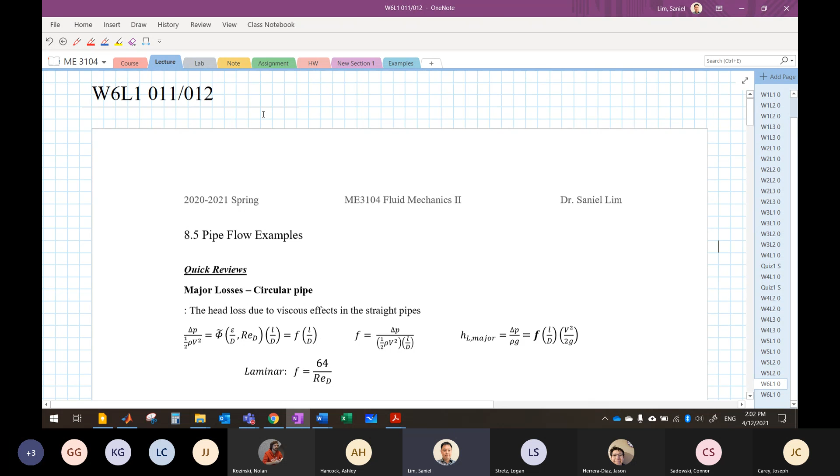Okay, let's go to lecture. Now we're going to cover some example problems of pipe systems—single pipe, multiple pipes, and multiple sub-components within turbine, pump, and so on. It's better to work on the lab rather than just solving problems in the textbook, but you're going to do both, so you can understand how to look up the Moody chart and how to apply it to the actual system.

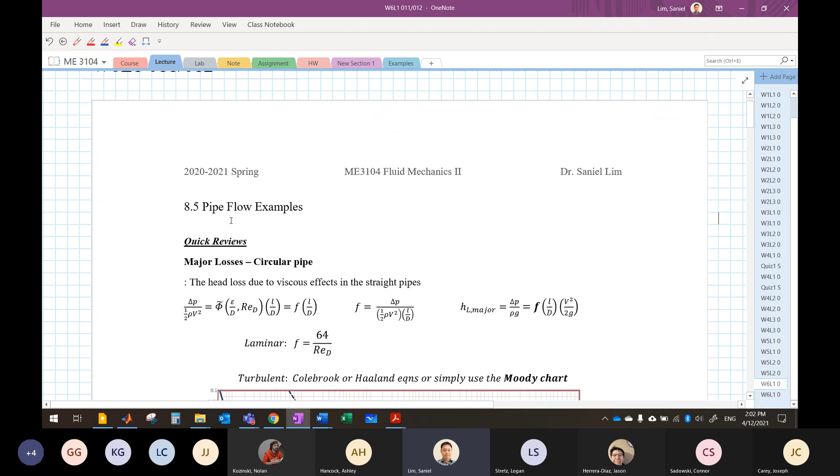Let's revisit the lab lecture materials from last week. We have two losses: major losses and minor losses. Major losses are because of viscosity effects as flow moves down the pipe. We ran the dimensional analysis and found the pi terms—one here, another one here. This one gives the pressure drop within the pipe in dimensionless form, and this one gives the properties of the surface roughness.

If it's laminar flow, we can just ignore the roughness term. There's a Reynolds number, which gives the dimensionless group relating to velocity in the pipe, and L over D, which is the geometry of the pipe, characterized simply by the length and diameter. In order to characterize the viscous effects in the pipe, we introduced the friction factor, F—simply taking the whole part in front of the geometric property, since we know there's a linear relationship between pipe length and pressure drop.

So we can treat this whole middle part as the friction factor. In head form, the head loss equals the friction factor multiplied by L over D, the geometry of the pipe, times the dynamic pressure, which came from the dimensionless group of the pressure drop. If it's laminar flow, we can apply the exact solution found from the Navier-Stokes equation or the Bernoulli equation.

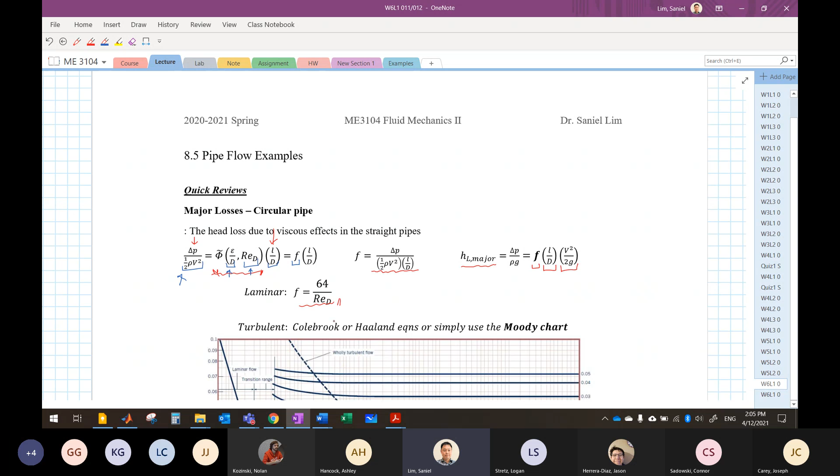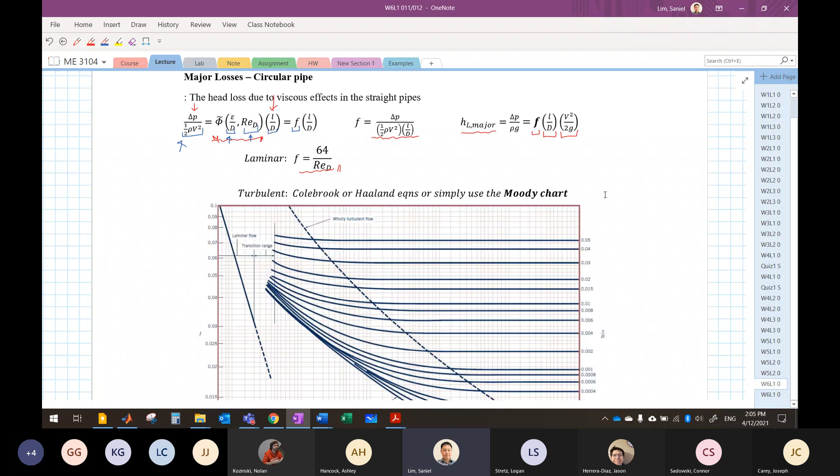Then for turbulent flow, there's two equations. We have Colebrook, and another one's a modified Colebrook or Haaland equation, or you can just use a Moody chart. If you just finish this course, I hope you at least know this Moody chart was part of the lecture. You're gonna look up this Moody chart if you deal with any pipe system from now.

This single graph gives you a whole bunch of information relating to the viscous effects in the pipe, and how to calculate the pressure drop based on the length of the pipe, diameter of the pipe, material of the flow media, and whether it's laminar or turbulent. All the information we learn in the chapter, partially in chapters 6, 7, and more than half of chapter 8, is actually described in this Moody chart.

What's that? Moody chart? Oh, which one? Oh, no, from this course. Yeah, probably you've heard about this chart, but we introduced this one especially from the lab lecture. I talked about it, and you know how to use it from the example problem from now. So I'm gonna just use it for the example problem.

There's another table we can find in the textbook, the surface roughness table. Of course, if it's given in the problem, you can just use it. But if it's not, you can look up this table based on the material, manufacturing method, and fabrication. So there are different types of roughness characterized within some range.

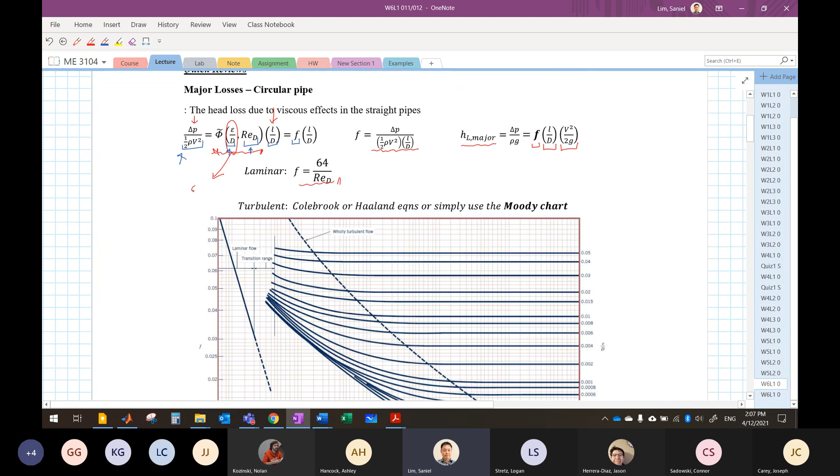To find this dimensionless surface roughness divided by the diameter, you can just look up the number here, then find your curve. If you know the Reynolds number, you can find the location within the graph. If you know the friction factor, you can locate the position there. Or, in the opposite way, if you know the friction factor and the Reynolds number, you can characterize the flow based on the surface roughness.

So these equations are the ones listed above. The first one is the Colebrook equation. In this equation, you have the friction factor on both the right side and the left side. It's really hard to solve. So you need to either iterate the calculation based on your assumed friction factor, put that into the right side, and find the left side. If it's not matched, you can just assume another one and keep going. So probably 3 or 4 iterations will give you the right answer.

It's a rough approximate solution. For the modified one, the Haaland equation gives you a single equation, so the friction factor can be found explicitly. When you plug in the surface roughness and velocity in the Reynolds number, and you know the fluid in the pipe, you can find the friction factor from this equation. Of course, you can also just draw this graph to find the Moody chart. Okay, so it's fine.

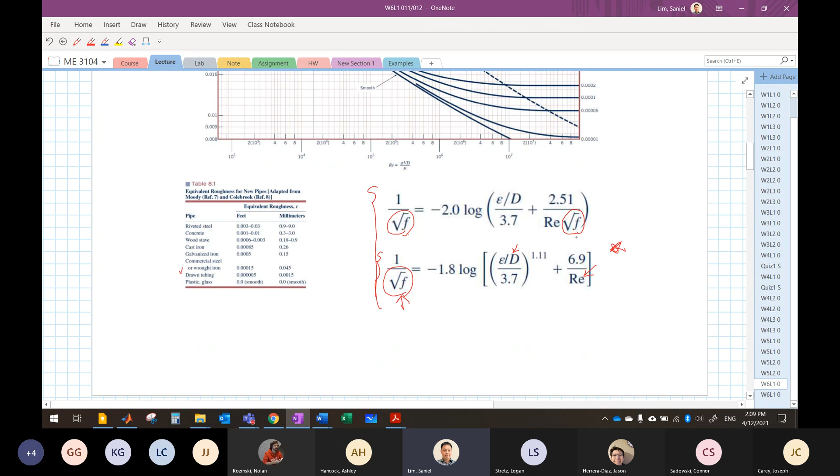You can use either equation, but usually you'd prefer to use the second one. The error between these two equations is going to be less than like 0.5%. But of course, this is pure empirical data, the Moody chart. So even if you find the right number here, it's going to give you at least... I don't know what the rule of thumb is in the textbook, but I bet it's going to give you at least like 10% error from the Moody chart.

But you can roughly know what the flow within the pipe is using this chart. So just do not obsess with finding the accurate value in the Moody chart. No, that's not the case.

For example, if I got the relative surface roughness as 0.002 here, and I want to find the Reynolds number like 10,000, then you can just follow this graph. 10,000 is here. Then I want to find the friction factor, so you can locate the point here. It's going to be roughly here, that's 0.03... no, it's going to be 32, 34, 36, so it's going to be 0.035. So you can find a number like that.

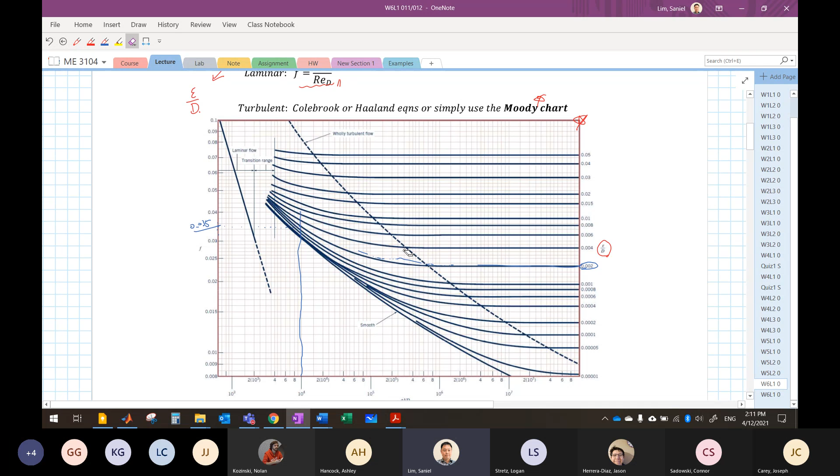All right, these are rough numbers. So just don't try to find a really exact number out of this. It's going to give you 10% error anyway. Okay.

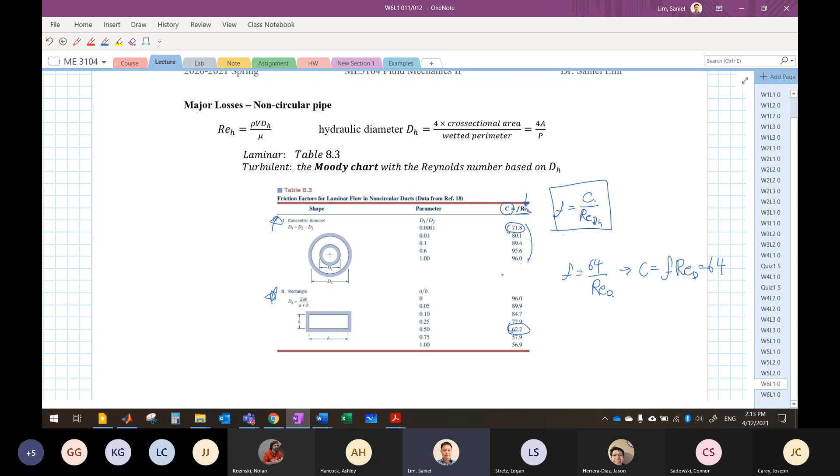What was the friction factor for laminar flow? It was 64 divided by the Reynolds number based on the diameter. So if you look at the values here, the C value is pretty close to 64 at some point, with some range close to 64. It's just a little bit lower or higher than 64 depending on the different shapes of the pipe. So you can have some sense that 64 is a reference value for the circular pipe.

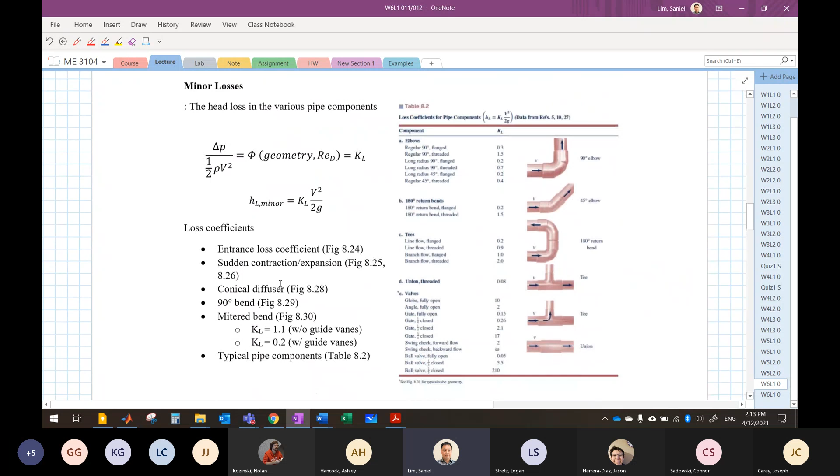And the minor losses - what do you calculate in the lab? It's going to be minor losses, the loss coefficient for each part. Especially you're going to calculate the friction factor and the surface roughness in the steel pipe and the copper pipe. Then the rest is going to be a venturi system. The venturi system is also a device measuring velocity, but it's also a single component within the pipe system, so it has some losses.

So this is head loss in the various pipe components. Regardless of the type or shape of the components, if it's not the viscous effect, it's all minor losses, and these can be more significant than the major losses in some cases. So pressure drop divided by dynamic pressure is a function of geometry and the Reynolds number instead of surface roughness and the length of the pipe. So we take this whole function as a loss coefficient KL, which we can convert into head loss form.

Then head loss by the minor losses is KL multiplied by V squared divided by 2G. It's relatively easier than the major losses because it's basically based on empirical data. So if you know the KL, you can just plug that into the equation to find the head loss or pressure drop by the minor losses.

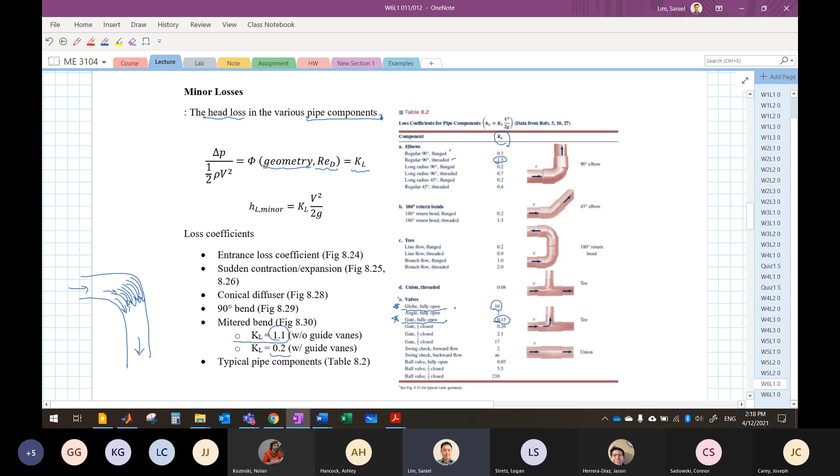So of course, I didn't ask you to find the loss coefficient of the globe valve and the gate valve. It's not a part of the lab, but you can see the globe valve, if it's fully open, we still have a 10 loss coefficient. And the gate valve gives you only like 0.15, fully opened of course. The flow is pretty much at the same flow rate we designed in the system, but just existence of the globe valve itself gives you the 10 loss coefficient. Pretty much a lot of losses, right?

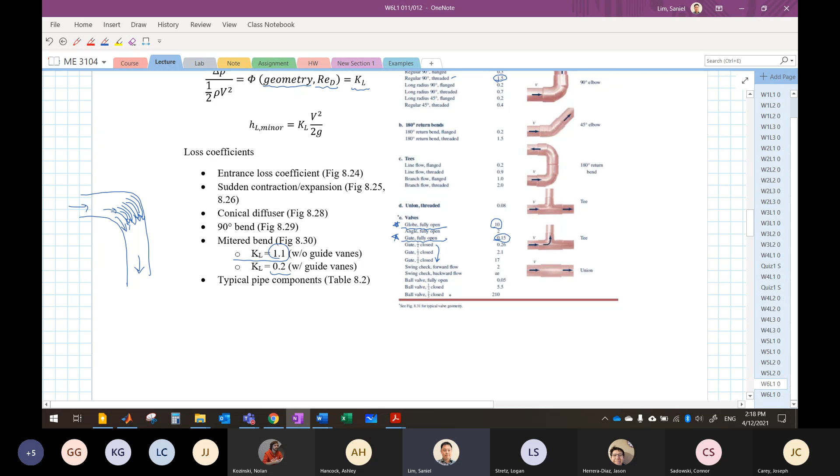Then of course you can find all the different loss coefficients when it opens halfway or a quarter, and so on.

Now we have a little bit of examples here. I'm not gonna solve all the example problems here. We have a lot of them, and it's going to be very useful when you take the next exam and quizzes. But I'm gonna just post the solutions of these examples. Of course, you have all the numbers and solutions in the textbook, but I'm gonna just solve it again with my words. Then you can just take a look at the steps of the problem solving one by one, line by line, to apply those loss coefficients and find the friction factor for each component.

So we can simply use the energy equation. You saw this a lot, right? From chapter 5. I just modified it a little bit, putting the pump head and turbine head. This is pump, this is turbine. So basically, you can apply work into the flow itself, or you can extract energy out of the flow. That's why we place this head on the left side for the pump, and on the right side for the turbine. Then we have a loss head.

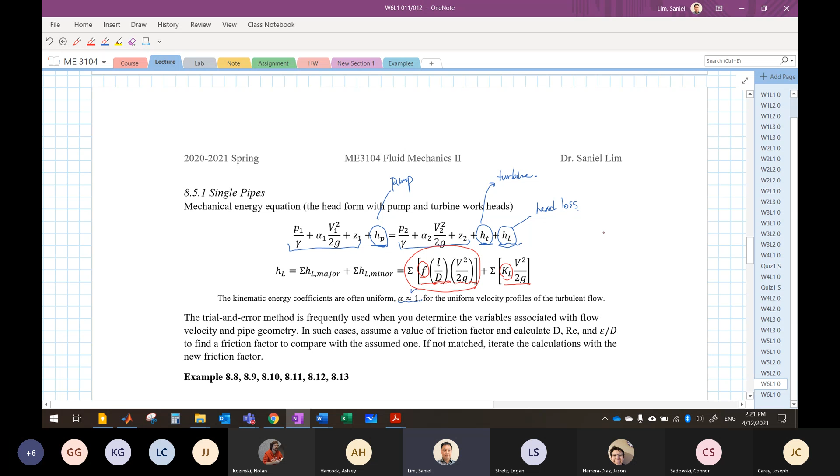Then, for example, if you look at the pipe system under a sink, you might see a lot of 90-degree bends, like more than 5 or 6, then this part is going to be dominant in the loss.

So if you apply this method, you can just solve it, but there's a lot of variables going on. So please just make sure you write down all the variables, especially density and viscosity, which are all going to be shown in the table B1, B2 I guess. But also, you can write down all the pressures or velocities or flow rates or heights given in the problem. It's better to just write them down on the sides of the paper, then you can work on the equations.

But the thing is, if the pressure drop is given, then what if the problem asks you to solve for the diameter or the velocity in the pipe? Then you have to solve it backward. But the thing is, you have a V squared inside, or the diameter is associated with it, especially in the friction factor, and you've got to put that into the Reynolds number again. So it's not going to be easy to solve explicitly. In that case, just remember one tip: assume the friction factor, right?

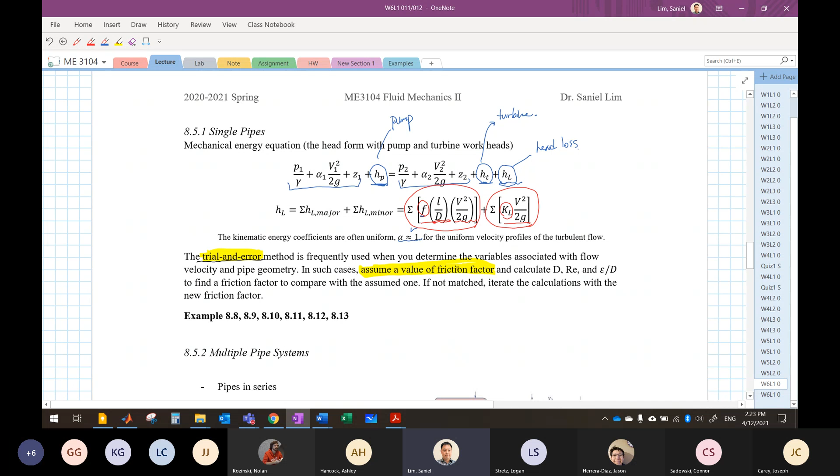You have a lot of variables, so you do it this way. Make the assumption that the friction factor is, let's say, 0.002. What you're going to do is go to the Moody chart.

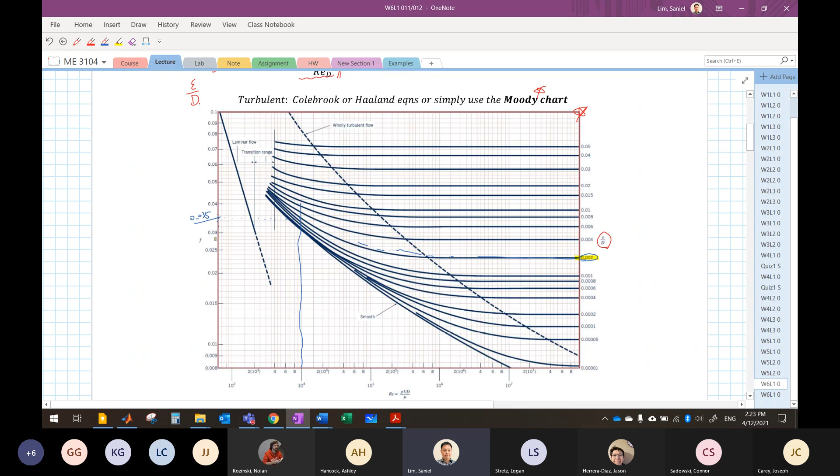Use this number. Then if you know the velocity, you can find where it corresponds. If not, you can make the assumption with different variables to find the friction factor. Then you can find the Reynolds number corresponding to the points, then find the velocity.

Oh sorry, that's not the one. So here, like 0.02. That's here. Okay, this is 0.002, probably about that area, right?

So you can go this way, then find the surface roughness and the Reynolds number. Based on those variables, you can just find the location there. Then using these values, what you're going to do is find the friction factor again.

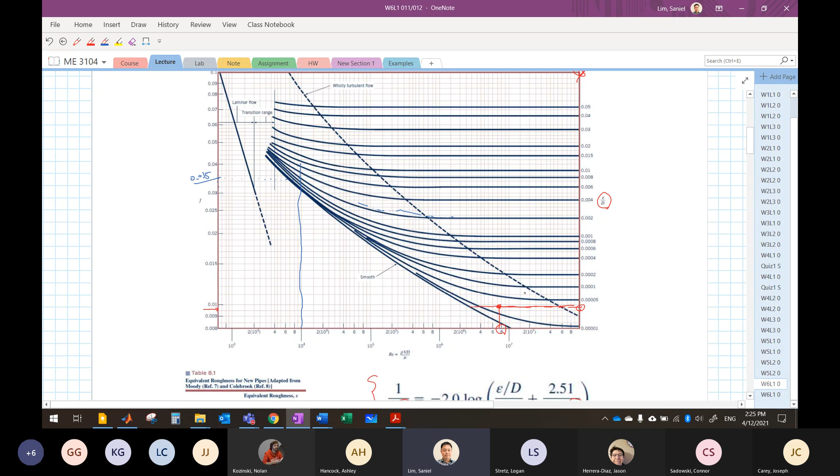Then if the friction factor you assumed doesn't correspond to the one you found in the Moody chart calculation, you can reapply the friction factor to the Moody chart and find another Reynolds number, and keep doing the iterations like that. So it's better to solve the problem using the trial and error method.

But just one thing: let's make the assumption of the value of the friction factor first. That's going to be the easiest way to solve the problem.

If that's the problem on the exam, I'm not going to ask you to do more than 2 or 3 iterations. You probably just need to shoot the variables within a certain range and repeat the calculation twice. That will be good enough to conclude that your answer for velocity is some number, or surface roughness is at a certain number, things like that.

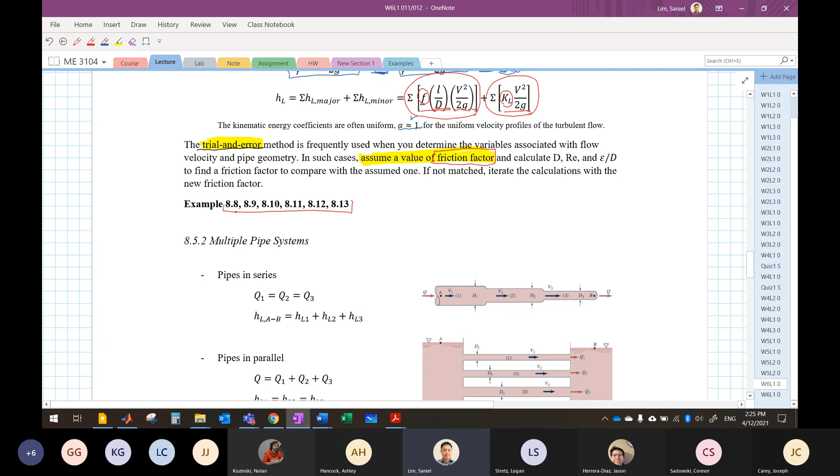All right, we have these sets of example problems. If I have more time, I'll probably cover some. I'm going to solve the first problem, then I'll post all the solutions to these examples, probably today.

All right, then what if we have multiple pipe components within the system? Of course, at some points we have a different diameter within the system. Yeah, that makes sense, that's the usual case. Then what if we have a different route of pipes connecting to two different tanks?

If the pipes are connected in series, then you can imagine the total flow rate at the inlet and outlet should be the same, right? So we can write the equation that Q1, Q2, Q3 are all the same value. You can think of this as analogous to Ohm's law.

We have a little bit different relationship, but it's similar to V = IR. In this case we have a little bit different, and I don't use that method because it doesn't correspond to our system. But usually, if it's laminar flow, it's linearly related to the velocity in the pipe, so we can use it.

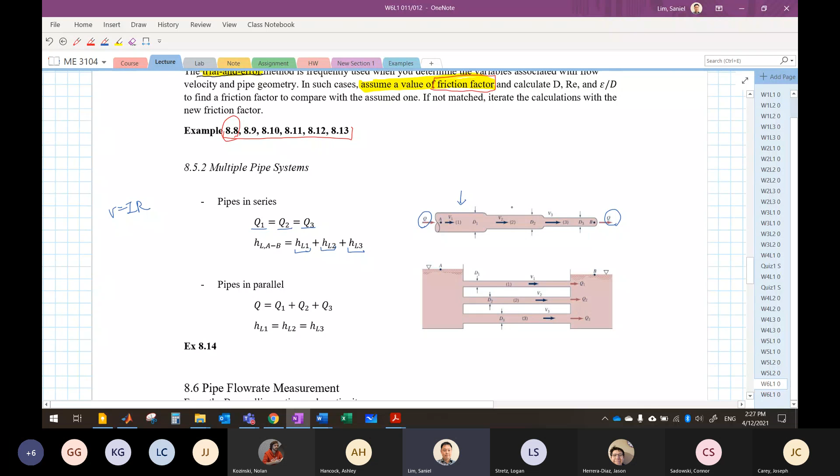But basically, the head loss is going to be just a summation of the head loss within each component. So if I have a head loss here, in other words pressure drop, for the first segment, second segment, and third segment, you can combine them all to find the total head loss.

What if the pipes are connected in parallel? Then the total flow rate should be Q1, Q2, Q3 added all together to find the total Q.

All right, and head losses are now a little bit different. The head loss should be the same value for each route. If we have a larger head loss in the first pipe, let's imagine that means we have more resistance in the first pipe.

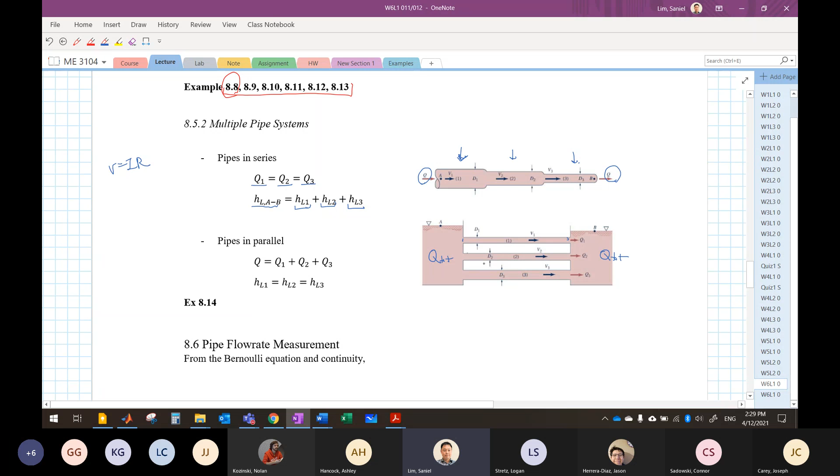Then flow is going to tend to flow down through the second and third pipes more, so you're going to have a change in the velocity and flow rates in the first pipe, right? So they're going to find the balance of this resistance, and the head loss should be the same between the 1, 2, 3 different pipes here. So regardless of the size of the pipe, regardless of how many components are within the pipes, the head loss should be the same between each pipe segment.

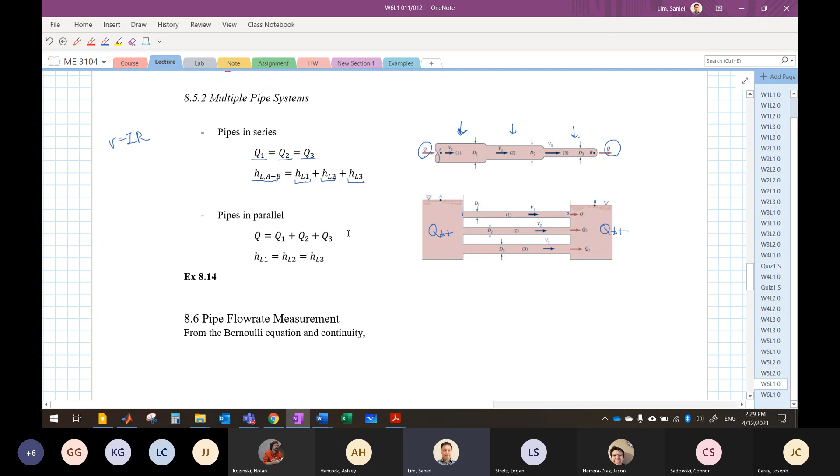So you're going to have one more example problem for this. I'm going to try to solve these examples with a lot of detail inside.

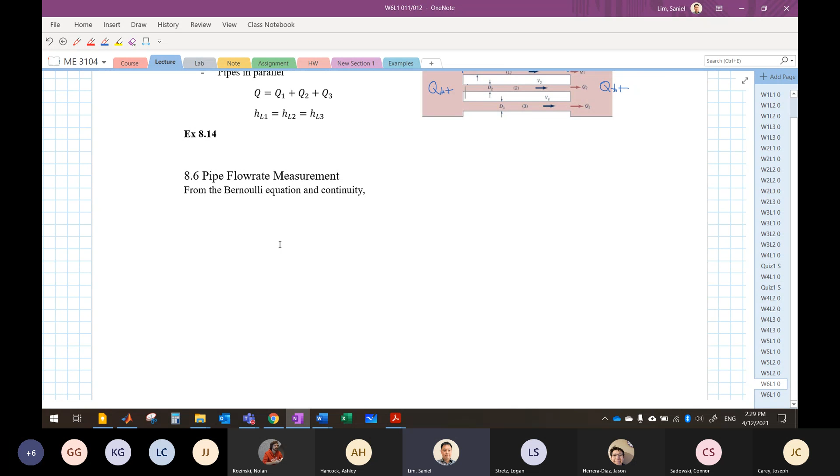Okay, so now pipe flow rate measurement. Let's derive the equation a little bit here. This is what you're going to do in the lab too. I introduced a little bit of it in the lab lecture. So from the Bernoulli equation and the continuity equation, what you have here is...

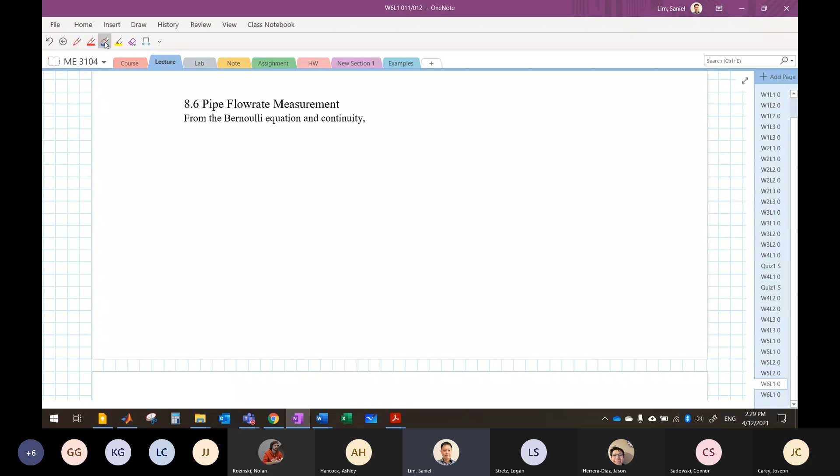Then of course you usually have a head loss, but let's say we don't have any losses here.

Just draw something here. Here's a pipe. We have some device here, whether it's a nozzle, orifice, or the venturi system, doesn't matter. Let's say we have a little bit of an obstacle within the system, then the flow is accelerated in the middle, then expanded again. This is the first location, this is the second location. Let's take a look at what's going to happen between this device. This is short enough, so we're going to ignore all the losses, which is the major losses and the minor losses. There's nothing here. That's my assumption.

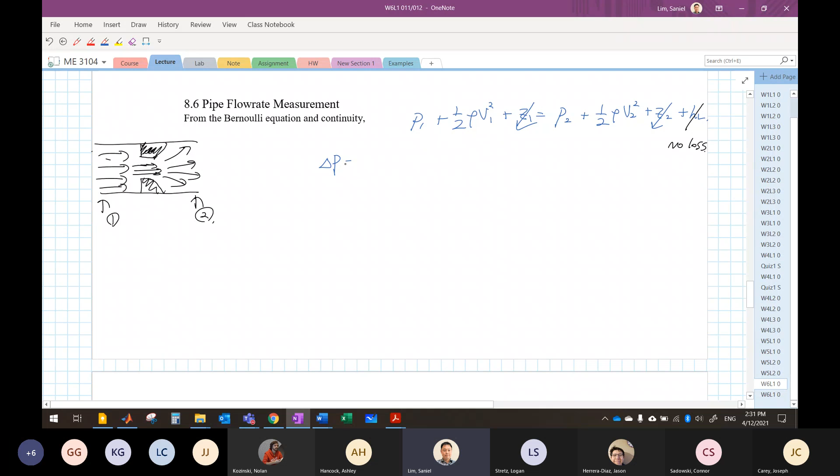What you're going to have here is, of course, we just set it in the horizontal position, so you can just ignore this again. Then the pressure drop, P1 minus P2, is simply one over two rho, V2 squared minus V1 squared.

Then what we're going to do is introduce the continuity here. According to the continuity, which is conservation of mass, the flow rate at the inlet should be the same at the outlet too. So Q1 should be the same as Q2. That means velocity at the inlet multiplied with the cross-sectional area has to be the same for the second location. We can simply rearrange it for V1: it's going to be A2 V2 over A1.

What if I just plug this into the Bernoulli equation here? Then it says P1 minus P2 is rho over 2 times V2 squared minus A2 over A1 squared, times V2 squared.

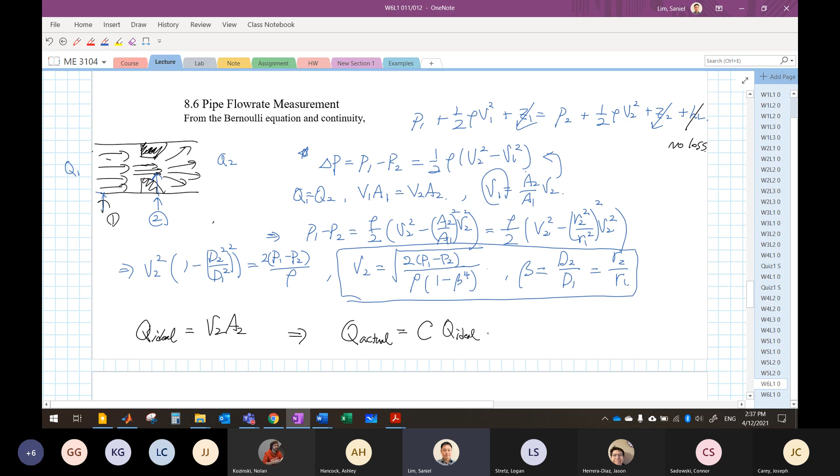No, there's going to be a little bit of resistance by this device, even if it's a meter. So it's not going to give you the ideal flow rate before and after the venturi system or orifice. Orifice is pretty much the obstacle, and the nozzle too. So what you have is the actual flow rate, which can be defined by one more coefficient here. I'm going to just put C here, and A2 V2 is the ideal flow rate, so the actual is C times A2 V2.

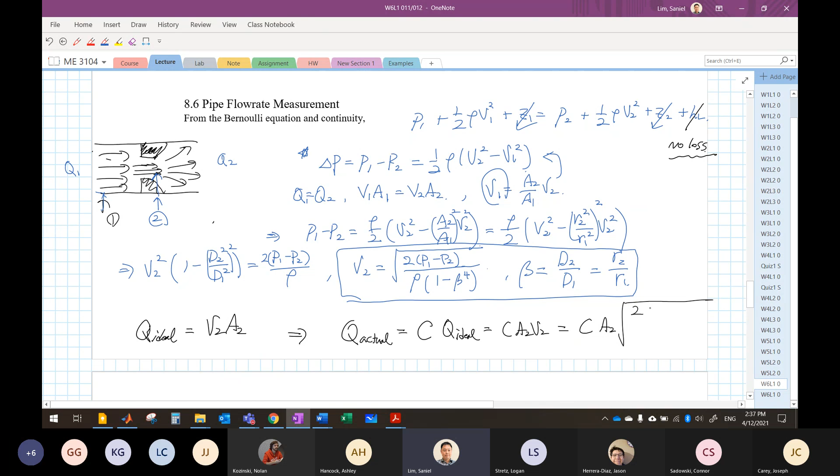Then you can just use this equation from the Bernoulli equation, because we made the assumption that there are no losses. It's going to be C A2, then square root of 2(P1 minus P2) over rho, times 1 minus beta to the 4th. So here, this C is what we call the discharge coefficient.

For the venturi system, you're going to find this discharge coefficient in the lab. This is for if it's an orifice, nozzle, or venturi system - the discharge coefficient uses subscripts O, N, and V respectively.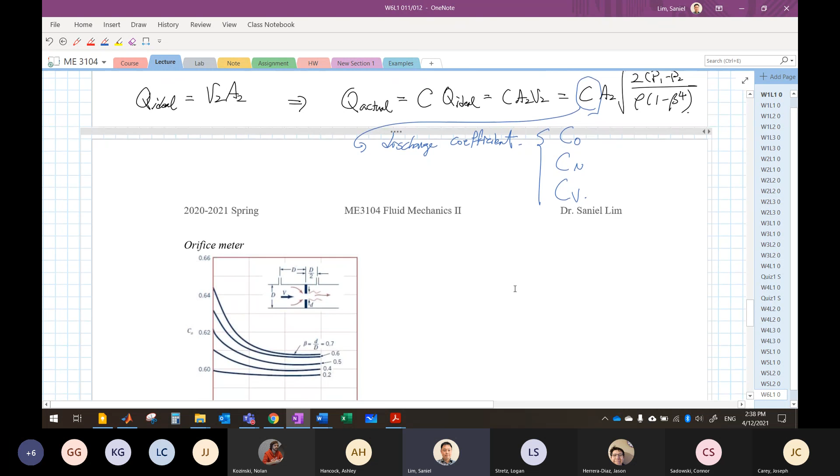If you go to the textbook, I've posted all the plots here. This is the empirical data set for the orifice meter. According to this plot, if you know the velocity at the throat - this is position 1, this is position 2 - and you have the Reynolds number based on the velocity of the flow, you can find the discharge coefficient of the orifice here.

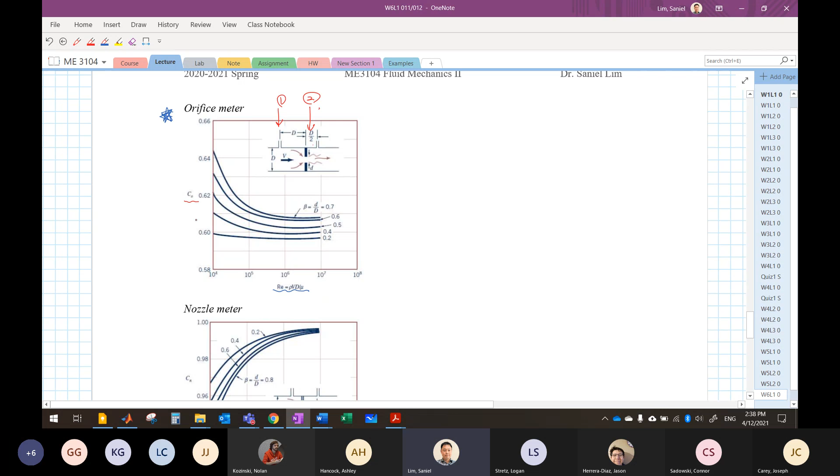If you know the discharge coefficient, let's go back - you can find the actual flow rate. Or if you know the actual flow rate, which is the lab case where we measure Q using the weight tank, then we know this value. Then you can calculate the value on the right side, which is the ideal flow rate, and from that calculate the discharge coefficient. That's what we're calibrating in the venturi system.

But usually these spec sheets or calibration table curves are given by the manufacturer, so we can just look up this graph to find the discharge coefficient for the orifice, nozzle, or venturi system. That's how you read this.

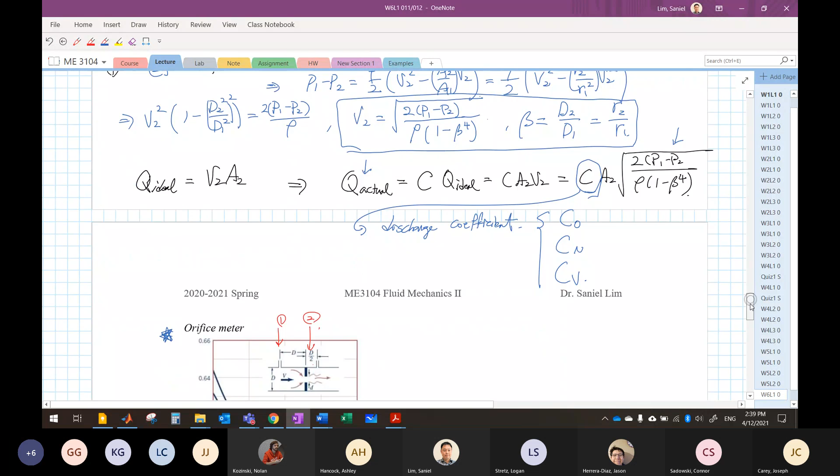For the nozzle system, you might get a sense of the level of the values here. We have 0.62, 0.64, 0.6 for the orifice - because we're essentially blocking it, literally plugging some type of iris within the pipe, so there's a lot of losses. But for nozzles, we have a smooth surface that increases the velocity without much loss before and after the nozzle system. That's why we have numbers more than 0.95 or so.

It's also basically based on the velocity of the flow and the geometry, which is defined by beta. Then you can look up the discharge coefficient values for the specific nozzle system.

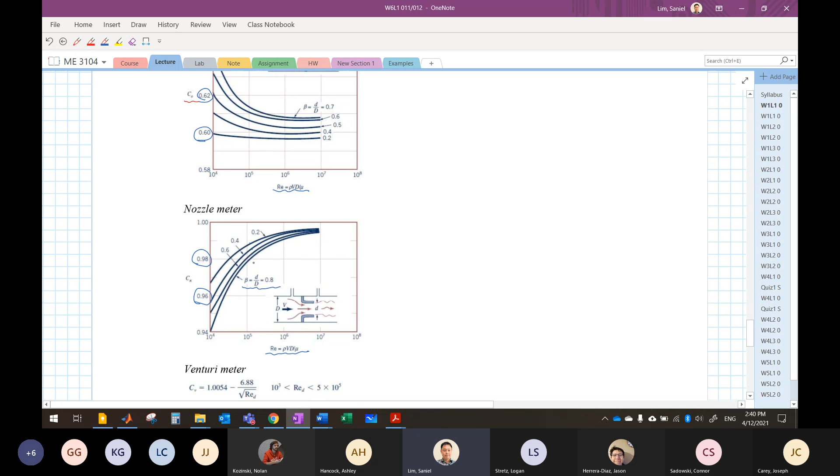The venturi system, we use a lot. You can go to ASME or many papers out there - probably from the 60s, 50s - they pretty much set up these equations. They developed more than 10 equations in the list out there, but usually they suggest using these equations to find the discharge coefficient of the venturi system.

So it's pretty much the curve of the venturi system. You draw this equation based on the Reynolds number, then compare your discharge coefficient from the lab to the one in the reference data. Of course, this is also from an empirical data set, so it's not the exact solution, but it's pretty accurate for anticipating the discharge coefficient in the system.

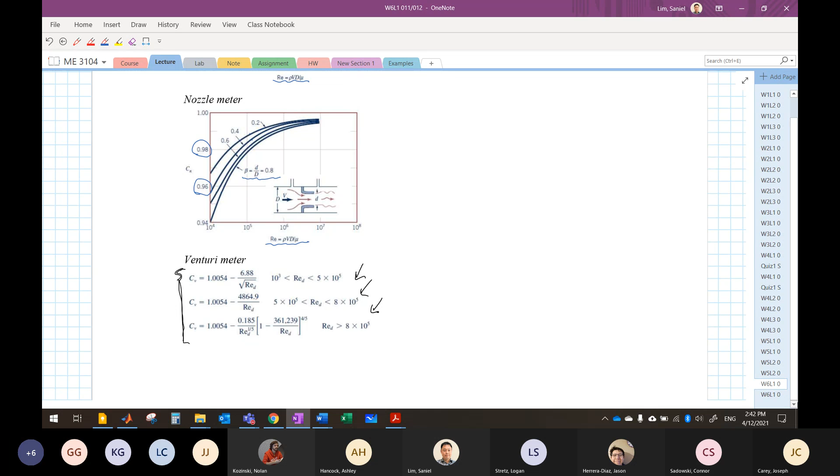All right, that's pretty much the part of the lab and chapter 8. What else? Then we can have a little bit of time - how much? Let's just copy it.

Let's go to this example - all right, let's take a look at one of the example problems here. So we have example problem 8.8, the first example problem in the example pipe flow. We're dealing with a water system.

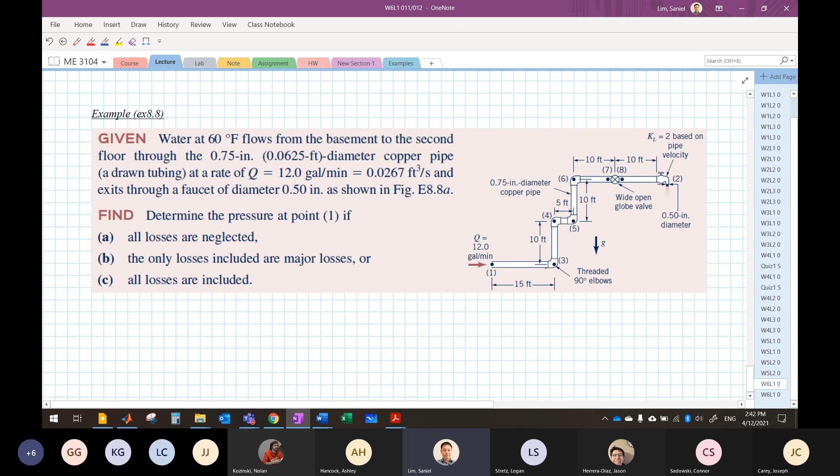You can see a somewhat complicated system with 90-degree bends here and there, and globe valves. We have taps here with a given diameter, some loss coefficients given, the geometry and diameter given, length given, and flow rate given. So it's going to ask you to find the pressure.

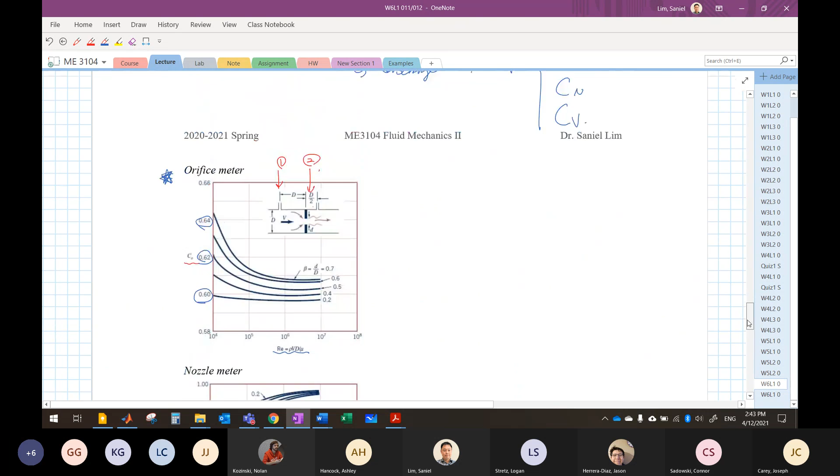Heights of the system are all given - we have 10 feet there, 10 feet there, that's going to be 20 feet between the first position and the second position. There's no pump. The pressures - yeah, you can find the pressure here.

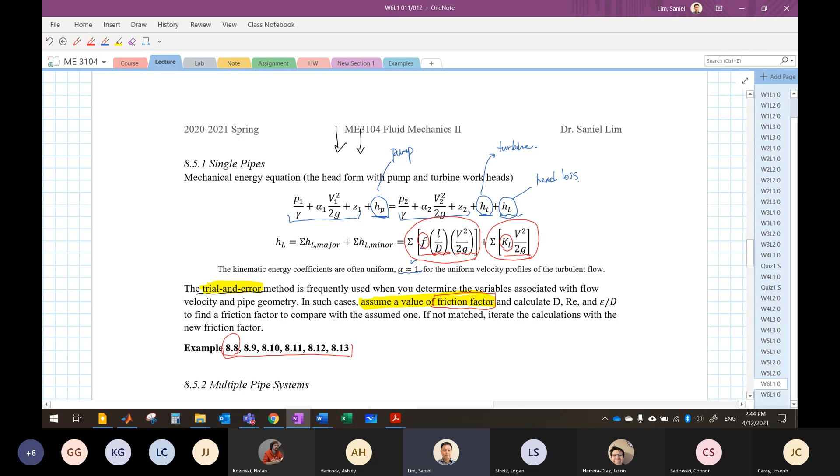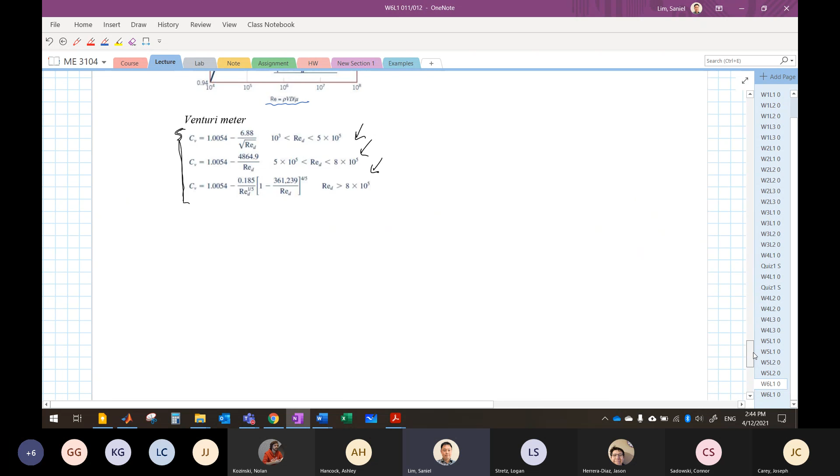Second position is what? The same surroundings, so it means the pressure should be atmospheric pressure, which is given. Then another velocity here - of course it's given, we know that. Height is given. There's no turbine, then there's a head loss, and we can find P. P1 is going to be the one single unknown in the equation.

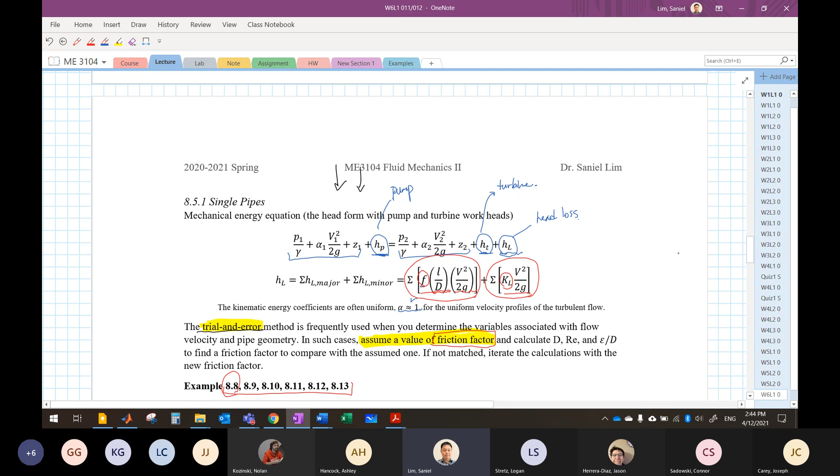There's no need to perform trial and error in this case. So we're going to find the pressure at point 1 if all losses are neglected, second only for the major losses, and if all losses are included.

Of course, I'm going to post a solution of these examples too. Let's just do as much as we can. If you go to table B.1, you can look up the properties of water - the density is given.

And viscosity, of course. That's why you have the temperature of the water here, just to look up the table. And simply you can just calculate the specific weight to make your life easier.

In the textbook, they use 62.4 instead of 62.47. So just stick to the textbook value, but accurately it's going to be 62.47.

What's given here is the diameter, 0.75 inches. Of course, you want to convert everything into the FPS system, or you can convert everything into the SI system. That's fine, I'll just divide by 12 to get the diameter. The flow rate is given as 12 GPM.

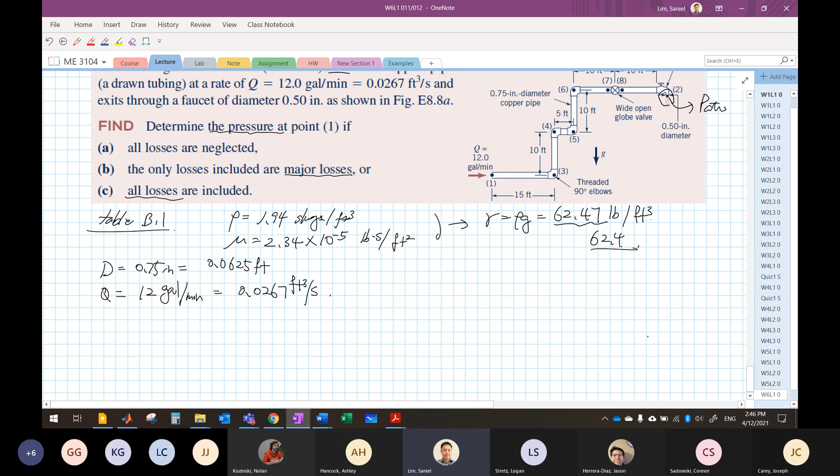Let's just apply the equation now. So simply we have P1 over rho g plus alpha 1 V1 squared over 2g plus z1 equals P2 over rho g plus alpha 2 V2 squared over 2g plus z2. Of course, we have a loss term there, but for the first case, we're going to ignore it, assuming there's no loss.

What's given here? Alpha can be assumed to be 1 if it's turbulent. You're going to check that later.

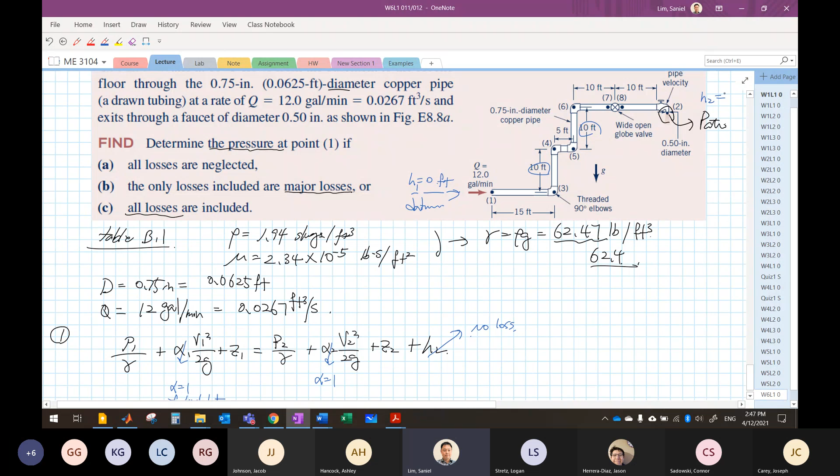If you go back to the problem, what's the height of the first location, the inlet? We can set it as a datum point. If it's the datum, height 1 is 0 feet. Then height 2 is 10 plus 10, which is 20. So this is 0, this is 20 feet.

What else? The pressure on the right side, the outlet, is released to the surroundings, meaning we have atmospheric pressure. So P2 is simply P atm. What else do we have?

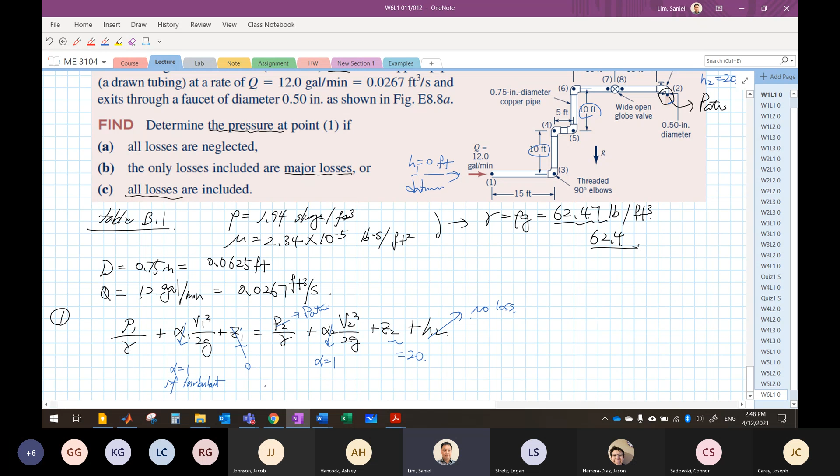I think that's good enough to go solve it. If we just rearrange it, we have P1 equals specific weight times z2... z1 is gone, plus one half rho times V2 squared minus V1 squared, plus specific weight times the head loss. Of course, we don't have any head loss.

And that's it. Then it's time for the velocity. We have the volume flow rate given, and it's simply velocity multiplied by the cross-sectional area.

So V1 is Q divided by A. That's 0.0267 feet cubed per second, divided by pi times the diameter, 0.0625 divided by 2, squared. Then you get approximately 8.7 feet per second.

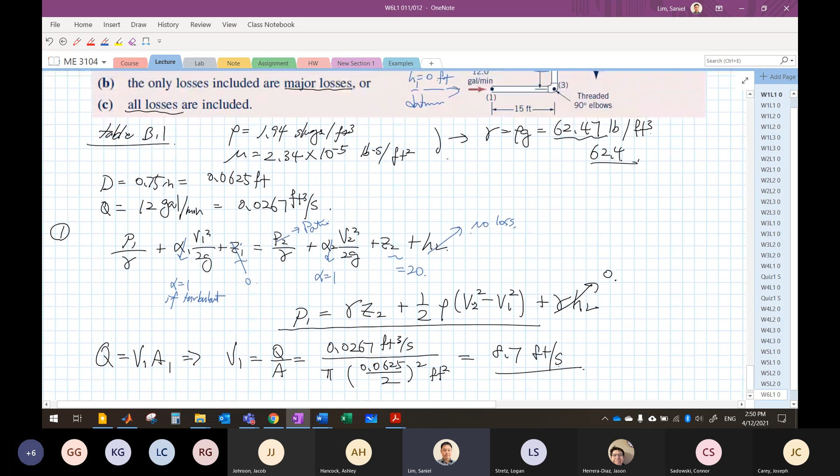So you have the velocity now. Then the next thing you're going to do is always find the Reynolds number. Whenever you have velocity, you want to check the Reynolds number to look up the Moody chart, or put it into the equation, but still you always want to check the Reynolds number. Why? Because you always make the assumption of turbulent flow to check if alpha equals 1.

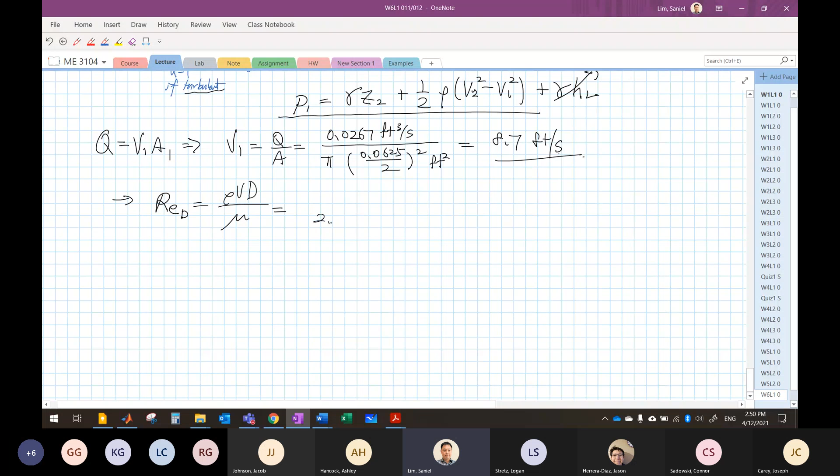So always do this step: Reynolds number equals rho V D over mu. When you plug in the numbers, what do you have? 2.34 times 10 to the minus 5... do we have this value here? Yeah. Density 1.94, velocity 8.7, just use at least 3 significant digits, diameter 0.0625. Then what you're going to have is 45,000.

So is this turbulent flow? Yes, larger than 4,000, so it's turbulent.

Then you can just plug all the numbers in to find the pressure value here. So P1 is going to be... squared, if there's no loss. So it's purely inertia pressure based on the location and the change in velocity of the flow.